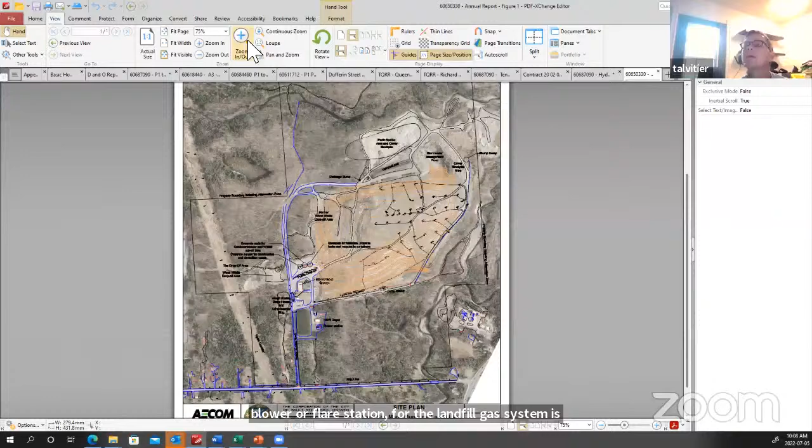I'm just going to switch over to an image of the landfill site just to get everybody acquainted with it again. So this here is what the landfill looks like from an aerial point of view. Down at the bottom end here is Fifth Line. Here's the main access road into the landfill site. We have our household hazardous waste depot. The blower or flare station for the landfill gas system is immediately south of that household hazardous waste depot. I'll just zoom in a bit here.

Just takes a minute to regenerate. We'll go in one more time here.

There we go. So we've got our household hazardous waste depot, our blower station, the two weigh scales for entering and exiting the site, and the public drop-off area. The landfill mass itself is over here where you see these orange lines, which are the final contours for the landfill site.

These lines with the little circles on them are the landfill gas collection system, a network where each dot is a vertical gas well connected by piping. That piping takes the landfill gas down to this blower flare station where it is burned. So that's a quick overview of the site.

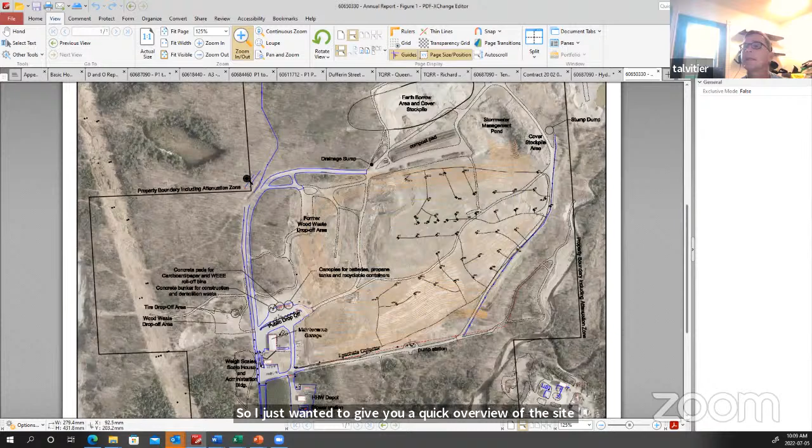A couple of things we'll talk about next: there's a stump dump where we store stumps, located in the northeast corner, where we manage them. There were some enhancements done to that area this year.

Similarly, this is our new wood waste drop-off area, immediately west of the public drop-off. Some of you may recall there was a former wood waste drop-off area in the northwest corner of the disposal footprint. Because we want to use that area for disposal of waste now, it's been moved over to the western portion, which is much easier for public access.

You now leave the public drop-off and come directly to the wood waste drop-off, where you can drop your clean wood waste off. We also have our tire drop-off area moved to this location - it was formerly on the east side of the public drop-off area, so that's also been moved.

So that's just a quick overview of the site. We may switch back to that as we go through the presentation here.

Earth borrow activities continue to be prevalent north of the disposal footprint. There's a large area where we can excavate earthen material and use that earthen material for cover, and that's been continuing.

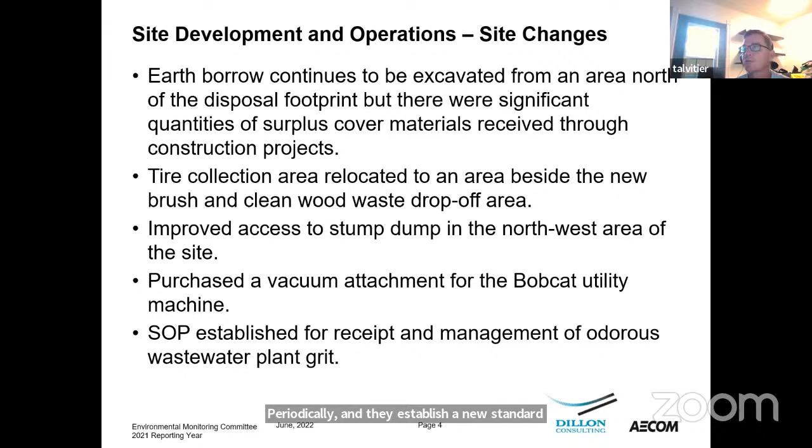The staff out at the landfill established a new standard operating procedure for the receipt and management of odorous wastewater plant grit. From the wastewater treatment plants we get the sewage sludge, but we also receive bins of grit periodically, and they established a new standard operating procedure to try and minimize odors related to the disposal of that grit material.

In terms of diversion at the site, we've got leaf and yard waste composting, which occurs north of the site. Immediately north of the footprint, where the landfill footprint ends, is the compost pad, where we have open windrows of leaf and yard waste being actively composted.

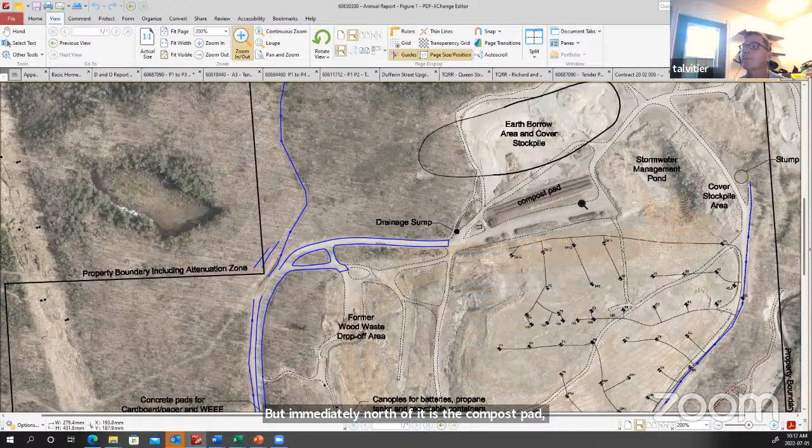I mentioned the earth borrow area, which is north of the compost area. This is where they're excavating material for cover on a regular basis.

In terms of diversion, we have leaf and yard waste composting, we collect tires, batteries, propane tanks, metals, various appliances, clean wood waste, and recyclables - our standard blue box recyclables, which include fibers and containers. You can see in the images here there's an area at the public drop-off for the blue box recyclables.

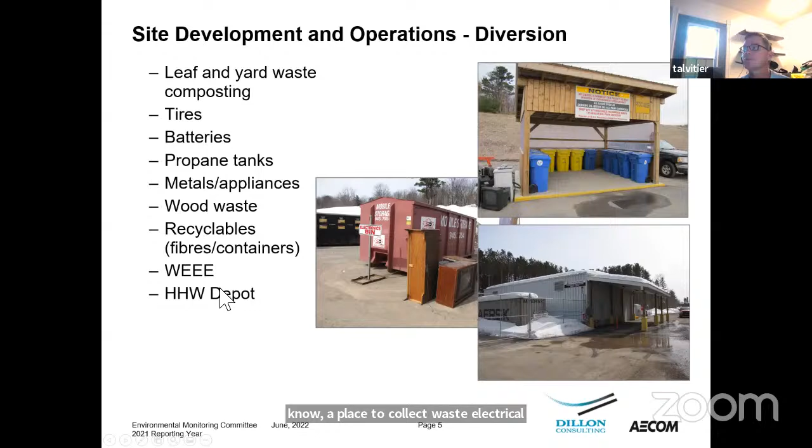In the bottom right corner, we have a picture of our household hazardous waste depot. This here is the electronics bin, a place to collect waste electrical and electronic equipment, and as I mentioned, the household hazardous waste depot.

In terms of litter control, there are a number of things done on a daily basis. The waste, as it's disposed of in the working face, is compacted daily with our waste compactor. Cover is applied daily to try and mitigate wind-blown litter. We also have portable and permanent fencing installed at the site - on the right image here you can see one of the permanent fences along one of the access roads.

This is along the eastern portion of the landfill. We have these larger portable fences installed right near the working face, and they can be moved depending on which way the prevailing winds are blowing on a given day. So they're used immediately at the working face.

And then we have litter pickup programs, both manual and industrial vacuum. This is one of the industrial vacuums, but they did purchase another industrial vacuum this year to use with the Bobcat.

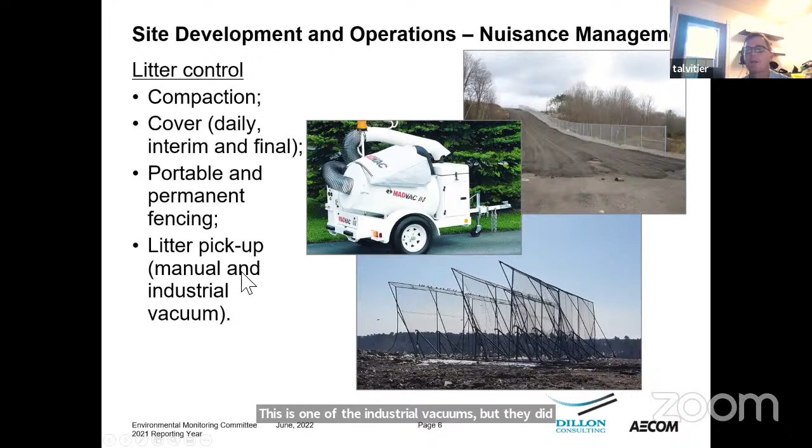In terms of nuisance management and in particular odor control, as we talked about, that active landfill gas collection system has a blower station which generates a vacuum on the landfill mass. We talked about those vertical landfill gas wells and the subsurface piping. So there's a vacuum generated within the landfill mass to draw the landfill gas down to this station. And here you see a flare, where we burn off the landfill gas. This particular system is now active across the better portion of half of the disposal footprint and has been very beneficial in reducing odor generated at the site.

One of the big challenges we've had is with respect to the biosolids, or sewage sludge. To manage the odors associated with the sewage sludge and its disposal, before the sewage sludge leaves the two treatment plants, there's an odor reducing or odor neutralizing agent applied to the biosolids in those trailers before they leave the plants and are transported to the landfill site.

Once it is disposed of in the working face, cover is applied promptly. And also when those empty trailers leave the site, there's another application of odor neutralizer applied to them. In transit to the site, we have impermeable tarps on the trailers to try and contain the odors.

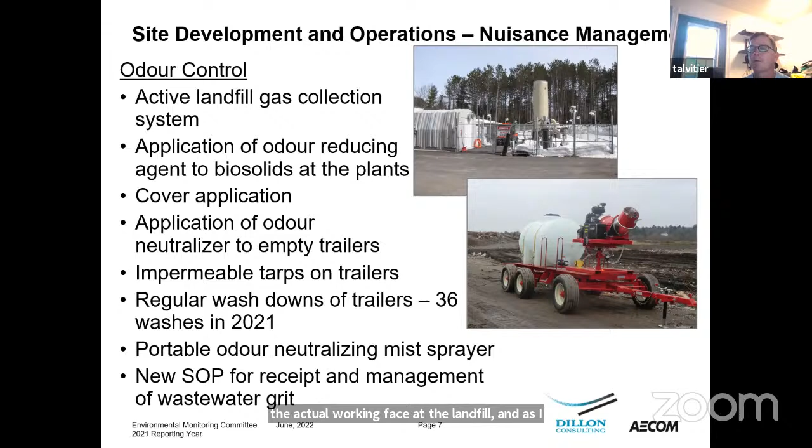At the site itself, you can see in the image here we have this portable odor neutralizing mist sprayer. Depending on the direction of the winds on a given day, this will be set up in a location during the disposal of the biosolids to try and neutralize the odors associated with the biosolids in the actual working face at the landfill. And as I mentioned earlier, there's that new standard operating procedure for the receipt and management of the wastewater grit as well.

In terms of odor complaints, we would like to jump up and down and clap our hands about the fact that we had no odor complaints in 2021. We realize, however, this is an anomalous year in the sense that we certainly don't expect that to be the norm. So the city is continuing with their rigorous activities and trying to manage odors as best as possible, and that same rigorous program will continue.

We are happy to see very little odor complaints, none in 2021. However, in general, we've been seeing roughly an average of about 10 odor complaints a year, so this was a bit of an anomalous year. Typically, based on historical odor complaints we've received, we believe they are largely related to the delivery and disposal of the biosolids.

Most on the call are aware that we are currently in the design phase of a biosolids processing facility, which will be used to receive the biosolids. It will be a building-type structure where, rather than dumping them in the working face of the landfill, the biosolids will be received, mixed with amendment, and composted in a controlled environment with odor control. Once that facility comes online, estimated to be 2025, we expect it will have a significant beneficial impact on odor as well.

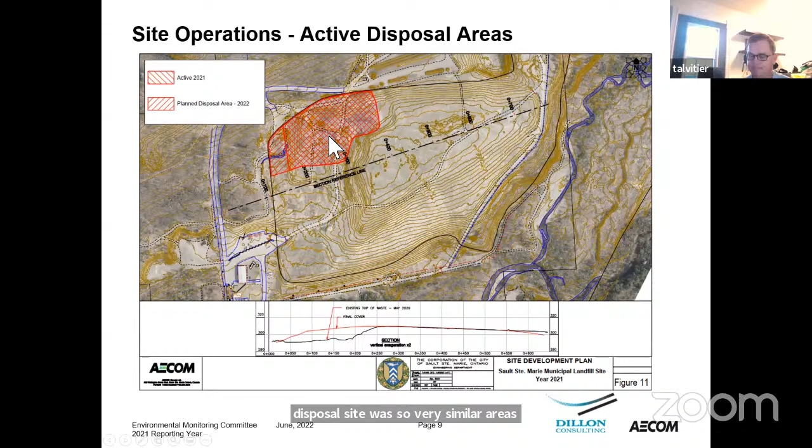If we have a look at this particular figure, what we're trying to show here is where we have capacity remaining within the disposal footprint. In the legend, as you get to a lighter color, specifically yellow, that means we've reached final contours and can't put any more waste in the site. As you get into the darker colors, the purple and dark blues, those are the areas where we have the most disposal capacity remaining.

Where it is purple, we have more than 15 meters of depth left to place waste. There's one little location here where we've got as many as 15 meters in depth of waste where we can place more. You can see where we've been active in the more recent past in this northwestern portion, where the color is becoming a little lighter as we use up disposal capacity.

I will note that this image is from April 2020, which was the last time we did a full aerial survey of the disposal footprint, so this only reflects what the capacity was at that time. We just completed another aerial survey of the site this past spring, and next year's report will show different colors, particularly in the Northwest area, where again we've used up more of the disposal capacity.

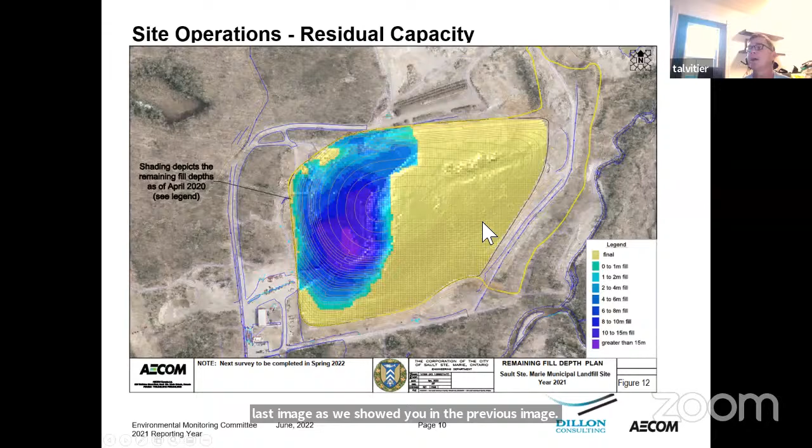Our residential diversion rate over the past 6 years or so has generally been in the range of about 30%. There have been some minor adjustments here and there, moving around from that 30%. We believe in 2020 there were likely some impacts associated with COVID that brought that diversion rate down moderately.

For those who have been on the committee a while, there are years prior to 2016 where we believe some results showed higher numbers than 30%, but there may have been some problems with that data. We think a reliable estimate of historical diversion has likely been in the range of 30%, going back all the way to about 2005. So we believe we've had about 30% residential waste diversion since about 2005, though some of this data between 2005 and 2015 may not be particularly correct.

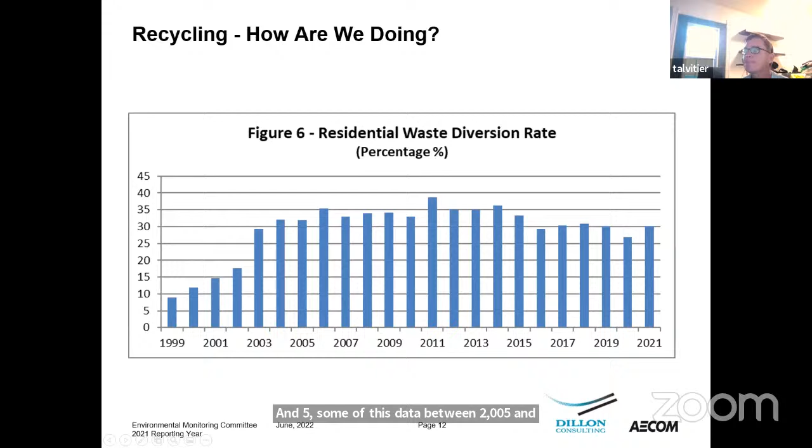In terms of waste disposal quantities, this obviously shows a telling tale. If you go back all the way to the time when the site was first purchased by the city, we were disposing of close to 100,000 tons per year. In the recent 6 years, we've generally been around that 40,000 ton per year level.

You can see that from 2005 to 2011 or 12, we were in the 60,000 ton range, then we went down dramatically to 40,000 and we've been in that range since. What I'll highlight is this reduction from around 2010 or 11 down to 2016 is largely the result of a significant proportion of the ICI, or commercial, waste being exported to a northern Michigan landfill. So it's not necessarily that we've reduced the amount of waste we're generating—a lot of it has gone to that northern Michigan landfill. We've been sitting now at this 40,000 ton threshold for about 6 years.

So if we compare and contrast waste received in 2020 versus 2021: up on the left is the 2020 waste received, down in the bottom right is the 2021 waste received. You'll see there's a huge difference in the number. In 2020, we received, this is waste received at the site, not necessarily disposed of, 62,000 tons. We received 112,000 in 2021, so a significant increase.

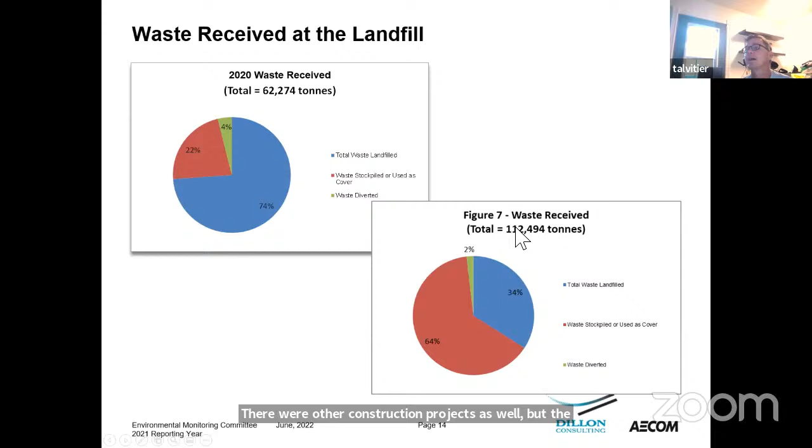There were other construction projects as well, but the lion's share of this increase is related to these materials that came to the site that are not really being landfilled. They're actually being put to use as cover material at the landfill, which means we may be able to do less of those earth borrow activities north of the site. So that's really the big difference in terms of quantities received.

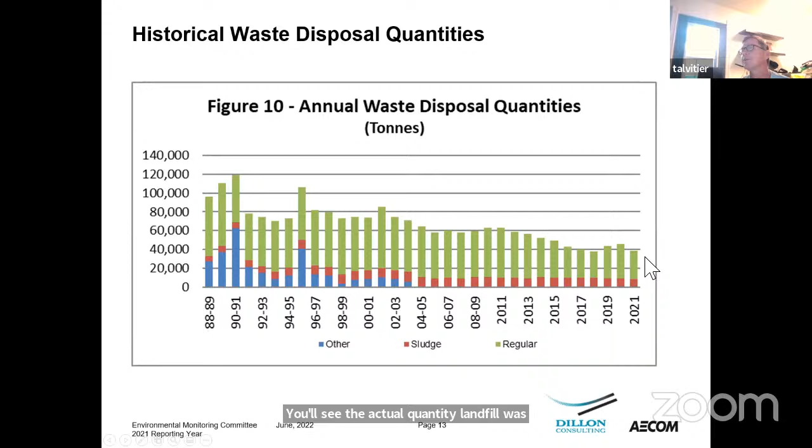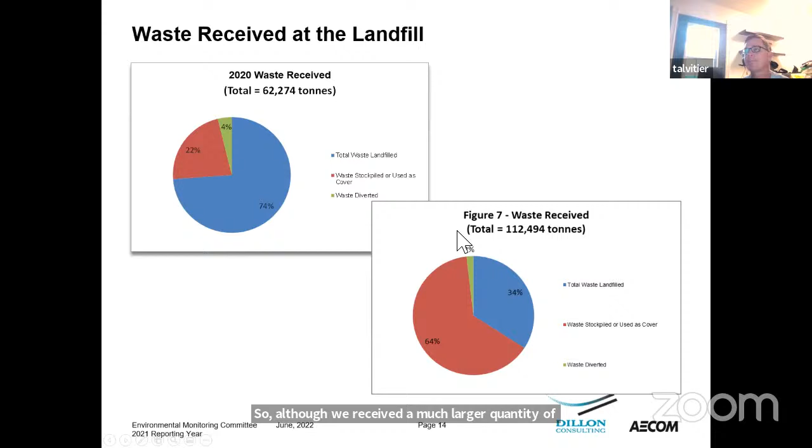Just to go back to the previous slide, you'll see the actual quantity landfilled was reduced from 2020 to 2021. So although we received a much larger quantity of material at the site, we actually landfilled less waste in 2021. We can look at the breakdown in the next slide here. This slide reflects the actual quantities that were landfilled in 2020, again in the top left, versus 2021.

So in 2020, we landfilled 46,000 tons. In 2021, we landfilled 38,000, so a reduction of about 8,000 tons. And the big reduction related to that is the public drop-off. There was a fairly significant reduction in public drop-off waste, about 2,000 tons less.

Why it's showing as a bigger piece of the pie is you'll see here, this little red area, now showing 0%, which was about 6% last year, reflects multi-residential. So in 2020, the city, as part of the city collection program, collected waste from multi-residential buildings. They discontinued that service in 2021, and it became a commercial operation. In other words, owners of multi-residential buildings had to contract with the private sector to collect and dispose of their waste.

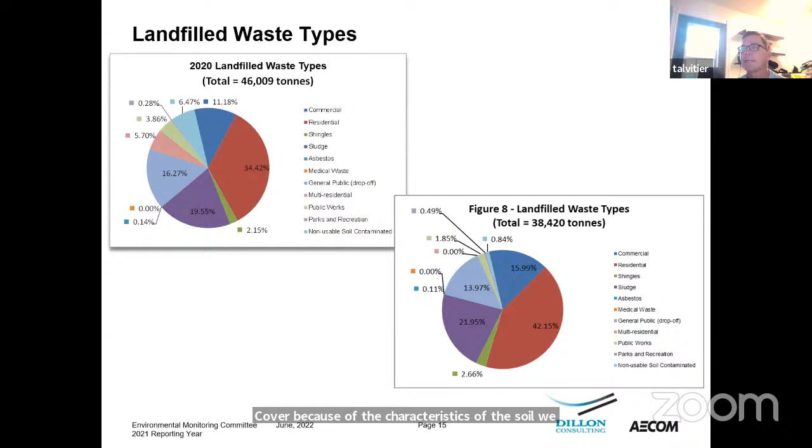The last item where we saw a big decline in 2021 is the non-usable contaminated soil, which you can see in light blue at the bottom here, which was about 6.5%, and we're down to 0.84%. So there was about 2,500 more tons of contaminated soil that we could not use as cover material. Sometimes the site will receive earthen materials that are contaminated but are not suitable for use as cover because of the characteristics of the soil. We can't use them as cover, so we actually just dispose of them in the working face.

So residual disposal capacity, we compute it and report it annually. There are fluctuations because the total height of mass within the landfill footprint reaches up to 30 meters. So over time, you will see settlement of waste. As you can imagine, you get that weight of 30 meters of waste on the bottom waste, there is some settlement that occurs. So year to year, you may actually gain some capacity in certain areas of the landfill mass due to those settlements.

Sometimes we do have interim cover, and we do have contaminated soils that are placed in the site and stockpiled, so those stockpiles may impact the calculation of residual capacity. And then waste types and disposal rates also impact the residual capacity.

As I noted, we didn't do a site survey in 2021, but it was just done in the spring of 2022. So to identify the residual capacity in 2021, we used the survey from 2020 and added to it the 38,000 tons of waste that were landfilled in 2021. We computed that we have about 5.3 years of remaining site life. The year before, at the end of 2020, we reported 6.1 years of residual capacity.

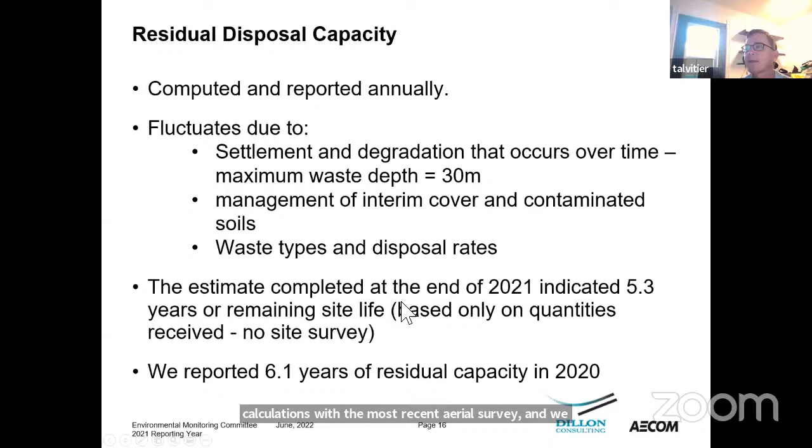And currently we're saying it's roughly at the end of December 2021, roughly 5.3 years. We are in the process of completing our quantity calculations with the most recent aerial survey, and we will be updating that number to be more accurate with those survey results.

Waste management EA, again, final submission is going to be made in 2022. We've been working with the city on resolving a couple of issues prior to making that final submission, but I think we all feel strongly that we need to make that final submission one way or the other in the current calendar year.

So we're going to do our best to resolve outstanding matters before it's submitted. If there are any outstanding matters, we certainly will be noting it in the submission that goes to the ministry. But our objective is clearly, I'm going to call it 99% final form right now, waiting for these little outstanding items to be resolved. If we're able to resolve them, we'll do that and then make the submission, or alternatively, we will make the submission as it is and make appropriate notes. So we're just sort of clearing the deck, and we'll be getting that in prior to the end of the current calendar year.

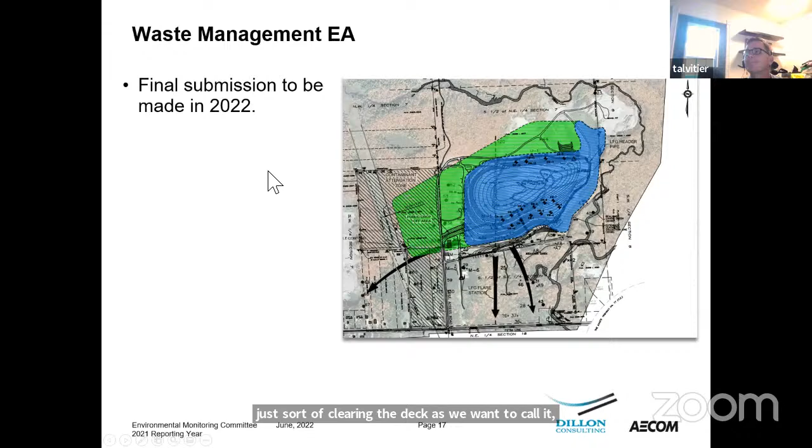Leachate collectors and purge wells. There are two methods that we collect leachate. Leachate, when precipitation, whether it's snow that melts and filters through the waste, or rainfall that falls onto the landfill mass and filters through the waste, it can pick up contaminants and become contaminated. We call that resulting water, the groundwater that now has some contaminants in it, leachate.

At our site, we have an engineered landfill where we capture the leachate by two different means. We either capture it by a horizontal collector, present along the south side and southeastern side of the landfill footprint. Bear in mind that the groundwater flows primarily in two directions: to the south and southeast, and to the south and southwest. So the groundwater at this site flows in a southerly and a westerly direction.

So that's where we have our leachate controls. One is the collector on the south and southeast. And then along the western side of the disposal footprint, we have a series of purge wells. There are 9 purge wells, duty wells labeled purge well 2 to 10, which operate 24/7, 24 hours a day, 7 days a week, continually throughout the year.

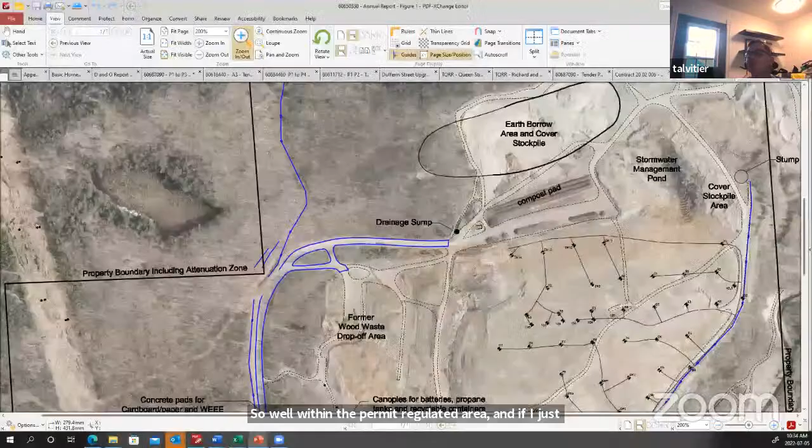And if I just quickly go back, before I turn it over to Rob, I'll zoom out here. So in terms of the leachate collector, it's hard to see, but it's this red dashed line. The horizontal collector stretches along the south limit of the disposal footprint and then continues up the southeastern portion of the site.

And this is basically a rock-filled trench with a pipe in it, much like a French drain. So as the groundwater flows into this subsurface rock-filled trench, it's collected in the pipe and is delivered to this pump station here. And similarly, on the western side of the site, we have those purge wells that stretch along the western side of the site here.

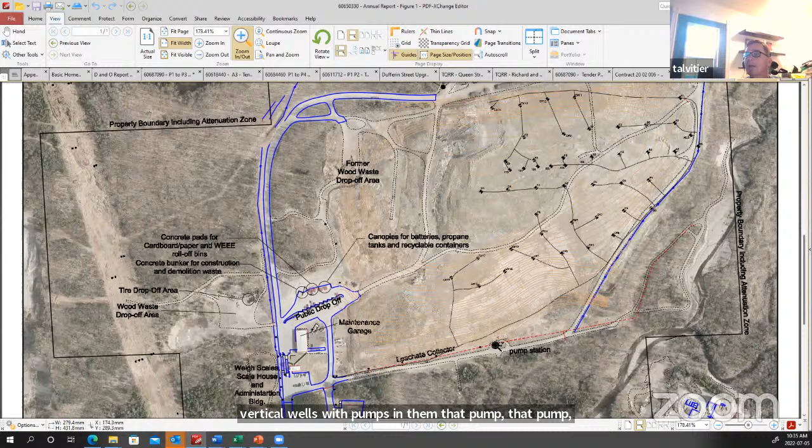They are operating 24/7 vertical wells with pumps in them that pump that leachate over to the pump station as well. And then from here, that pump station delivers that leachate through a force main all the way over to Fifth Line and Old Goulais Bay Road. And then it flows by gravity to the sewage treatment plant.

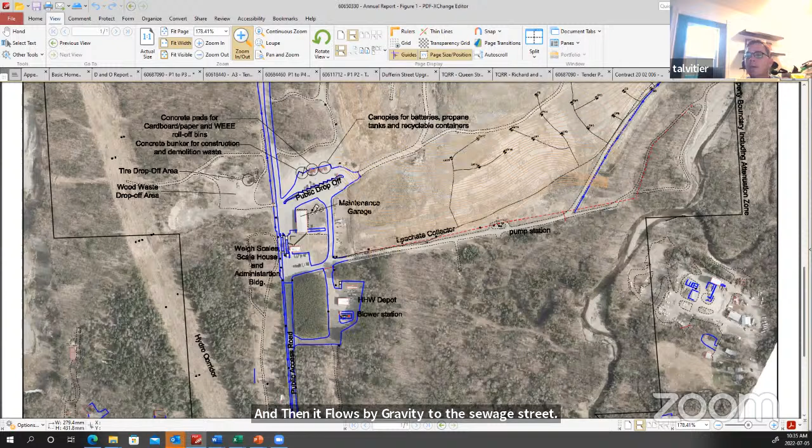So with that, I'll take a breather here and just ask if there's any questions regarding what I presented, and then we will turn it over to Rob and Monazer to talk about the annual monitoring report.

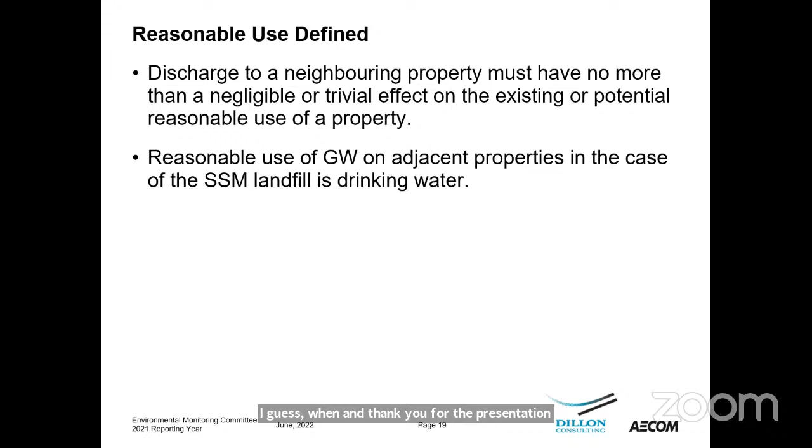I have a couple, but I'll save them for a minute. Yeah, I actually have just a couple of lay questions, I guess. And thank you for the presentation. Paul Christian here. When you were talking about the complaints, are those complaints regarding odor? Are those complaints, do we track where the actual complaints are coming from? In other words, are these all site-specific complaints?

Yeah, in general, so there is a protocol that is used by the operations staff at the site where there's a detailed record generated of the specific odor complaint. So for every odor complaint that comes in, there is a detailed record that is developed that identifies prevailing climatic conditions at the time, where the winds are blowing, what the climatic conditions are, where the odor complaint is generated from, what activities were ongoing at the site at the time, and what actions were taken by the site staff to try and alleviate the complaint. So it is a fairly detailed procedure. And Mike, I don't know if you want to add to that at all, but it is a fairly detailed procedure, Paul, that is used to certainly track the complaints and make sure every effort is made to address the complaint that is received.

Okay, thank you. Sorry, go ahead. So I think that covers that, Rick. We follow a procedure if we receive an odor complaint here at the landfill, and it's just like Rick said.

So I would assume then that for the most part, the complaints are coming from an area within hundreds of meters of the site itself, and not necessarily from any other location in the city in terms of the sewage plants, et cetera. This is all related to the site itself. Yeah, they are typically originating, Paul, within fairly close proximity to the site. Is generally the case. Yes.

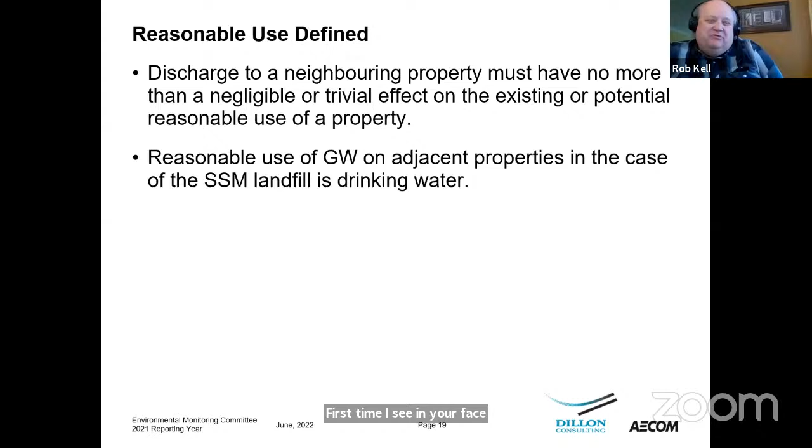So Monazer and I are both going to tag team this presentation, the remainder of it. Monazer and I have been working on the groundwater and surface water monitoring for almost 20 years together, so we're going to share the presentation. I'm going to present some of the compliance aspects, how we determine what impacts are occurring, and the groundwater portion. Monazer is going to present the surface water and the landfill gas portions.

So my first slide, and this slide I present every year, talks about how impacts are determined for a landfill site. Monazer talked about standards related to sewer use bylaws. There's also standards related to groundwater. The provincial water quality objectives that he mentioned are related to surface water.

But in particular for landfills, there's a concept called reasonable use, and that more or less says a landfill can't have more than a negligible or trivial effect on the reasonable use of a property in relation to water quality. For the reasonable use of groundwater, I do know there's a lot of municipal water available now on the fifth line, and the number of well users is reduced, but there are wells being used on the fifth line, and therefore drinking water is the reasonable use.

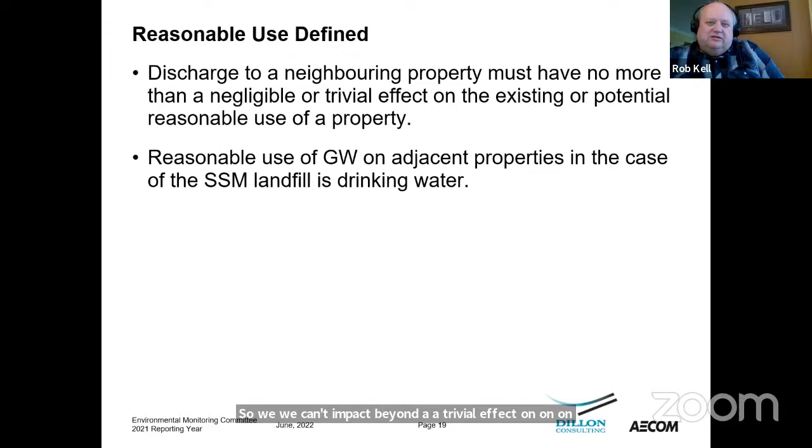So we can't impact beyond a trivial effect on groundwater. If I could have the next slide, I want to illustrate what reasonable use is graphically. More or less, the upper limit is our drinking water standard, and we're allowed, for health-related parameters, to only increase those by about 25% of the relationship between background and the drinking water standard. So the emphasis is that we're not going up to the limit in terms of the standard; we're only allowed a portion of that limit in terms of impact.

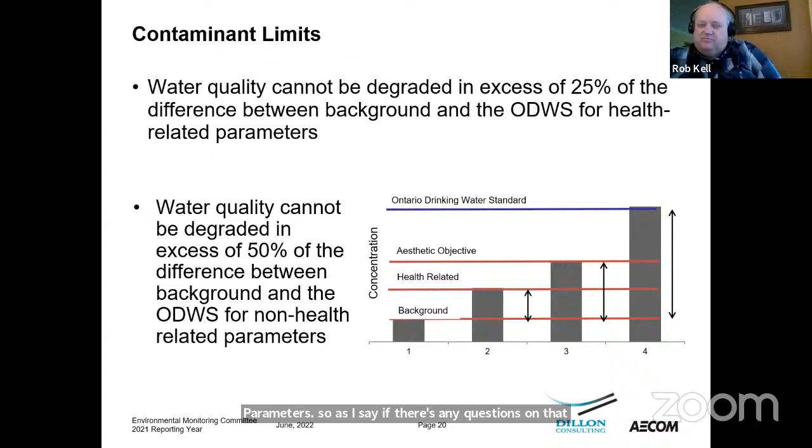For aesthetic parameters, and there are a number of those, the one we key on in the monitoring report is chloride, because of its high concentrations in leachate. We're allowed to go up to 50% of the difference between the background and the drinking water standard for non-health related parameters. If there's any questions on that I can answer them, but let's get going to the next slide, Rick, please.

So we have a number of what we call monitors, or monitoring wells—I use the terms interchangeably, so I apologize for that ahead of time. We have a bunch of monitoring wells on the site. The first monitoring well was installed on this site, I believe, in 1979. So there's a large number of monitoring wells that are either current or have been decommissioned. Right now, about half of them are in good condition to actually monitor, about 97.

But in terms of what's in our program, we have 40 monitoring wells that we key on and that we sample. It varies by location, but in areas where we have groundwater issues and so on, we sample 3 times a year. There are a couple of locations where we monitor less in terms of background, and other locations where the groundwater quality is more stable.

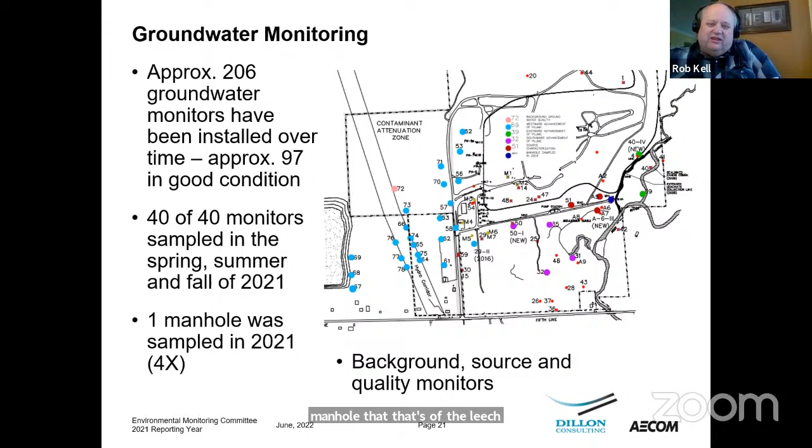And we've already mentioned, but we sample the manhole with the leachate that goes off site. It's not really groundwater related, but it's part of the program. So we sample leachate 4 times a year.

So what is groundwater monitoring? One aspect is not just water quality, but we use the groundwater levels in our wells to determine the direction of groundwater flow. The direction of groundwater flow helps us track where the groundwater is flowing to, and therefore helps us interpret where impacts are migrating.

As I mentioned before, the groundwater quality is assessed for compliance with reasonable use, which is applied at the compliance boundary, more or less the property boundary. In terms of the groundwater chemistry, we look at a number of things: major and minor ions, trace metals, and volatile organics.

Right now, our volatile organics are very low level. In terms of going for long-term trends, we really key on the major ions, and as I said before, in particular chloride, because of its high concentration in leachate. Metals themselves and how they move in groundwater...

What would non-scientifically be called heavy metals, or metals with higher atomic weight, tend not to move in groundwater. They have low solubility and tend to adsorb, or stick, to soil particles. So you'll see in our discussion some focus on things like iron, but things like lead and others are very, very low level, well below standards.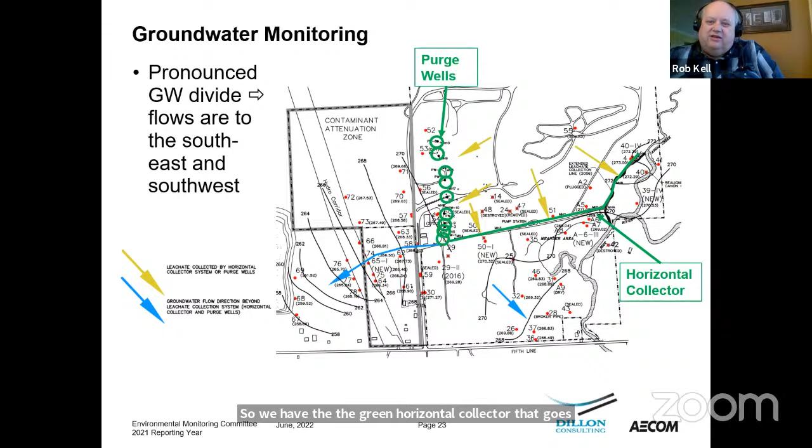And so that led to this dual collection method that we have for this site. We have the green horizontal collector that goes on the south side, and it was extended up along the former alignment of Cannon Creek to the northeast there.

And then we have these series of purge wells. One of the reasons we use a purge well system instead of a horizontal collector is that the water table is quite deep in that area, on the order of 60 feet or so, so we couldn't dig a trench that deep and put a collector system in.

So we have these series of purge wells that, through a combination of what we call well interference—when wells are installed close together, their zones of influence overlap—you get fairly complete collection, so water tends not to flow between them. The cones of depression actually add onto each other, and we get a good collection system. So those are the two methods at work there.

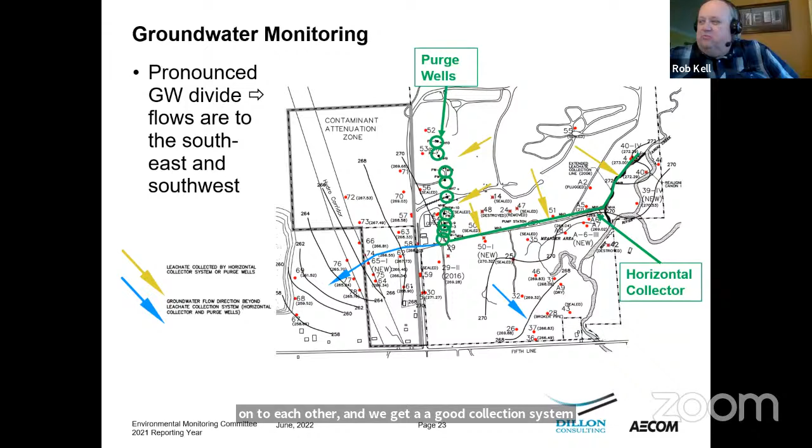In our discussion, we talk about how we assess groundwater, looking at the different areas of the site. The east and south boundary is in the former meander area, south of that horizontal collector, as well as potential impacts that could go towards Cannon Creek and potentially beyond.

This is an area that, when I first got involved with the landfill back in the early 90s, as the horizontal collector went in, all of the concern was placed solely in the meander area to the south, because of the impacts there. Since we've been pumping there for 30 years now, the impacts in the meander area are basically non-existent when you compare today's data with that of 30 years ago.

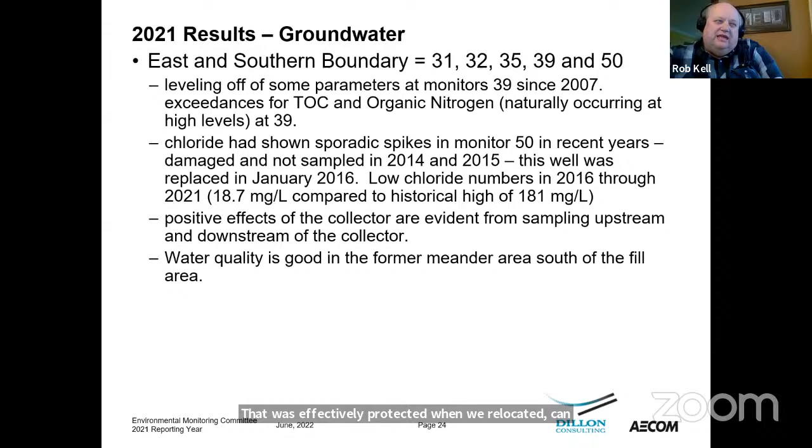And so this is a good news story. This has been very consistent since we've put in the collector system—we have good control of groundwater impacts to the south. Cannon Creek to the east was effectively protected when we relocated Cannon Creek a little bit to the east, allowing us to extend the horizontal collector system in that direction.

So we have that same type of protection. For the next slide, Rick, we'll talk about the west boundary. The west boundary, again, has very deep groundwater, so our monitoring wells are much deeper than in the meander area, where they're quite shallow, as you can imagine.

We've had impacts in that area, which caused us to install progressively more purge wells. I would say for at least 10 years, if not about 15 years, the purge well system has been very effective at limiting impacts. But we have identified a very small—well, not so much small, a very narrow—plume. So there's an area where we have impacts going to the south and west.

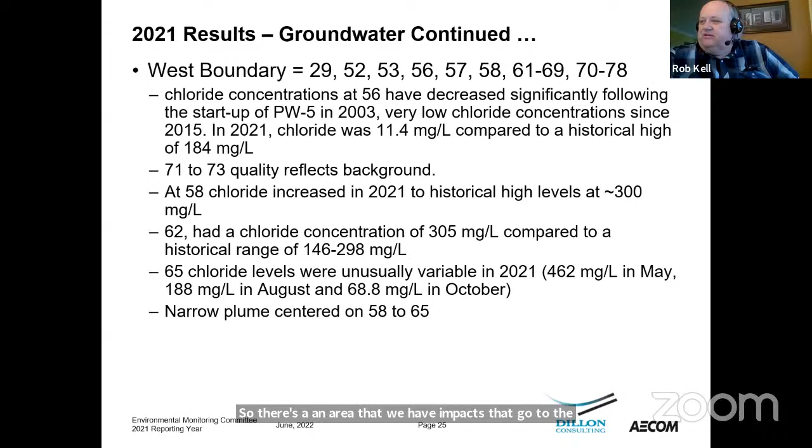Maybe the next slide, I think there's a graphic coming. Yeah, so...

This is an illustration from last year in May of 2021. You can see at 65, we have a pretty high value in terms of historical data of over 400 at that monitoring well. We do concentrate on this because it is an identifiable impact, but all those purge wells to the north are doing their job.

As one of the ways to mitigate this, one of the issues we've had is that our impacts seem to go - there's certainly no steady trend up, but we do have a few years of higher results followed by a leveling off and a decrease, and then we've had higher impacts here now for the last 3 monitoring years in a row.

So we've installed a new purge well, which is in between purge well 1 and purge well 3. And you can kind of see that it's in the heart of that - if you draw a straight line from 65 and follow those contoured plumes back, it goes right to that new well.

It was installed in late May and has been operational since. If you can recall, a couple of years ago we talked about perhaps putting this purge well in but having it as a standby well, a duty-standby situation. But for a couple of reasons, we're going to be operating it full time.

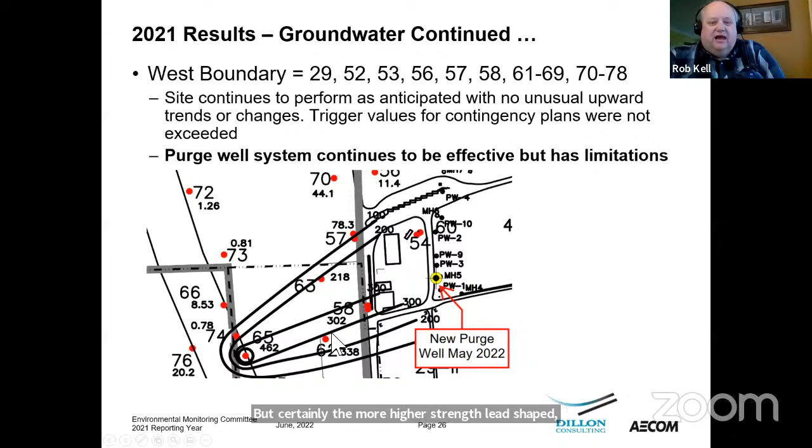In terms of the natural groundwater travel time, it takes more than a year to go from that purge well system down to 65. So I don't want to leave the impression that this is going to be an immediate fix, but certainly the more higher strength leachate we remove near the landfill, the better impacts we'll have in that narrow plume that I talked about.

So that's the end of the groundwater discussion. Muntazir has a few slides on surface water and landfill gas, and I'm happy to answer questions now about groundwater, or we could just wait for Muntazir. Why don't we do that, because at the end I'm going to come back with some conclusions that are also groundwater based. So I'm going to pass it on to Muntazir.

Hey, thanks, Rob, and nice to meet some of you and see some of your faces for the first time. Usually I just hear your voices. So nice to meet everyone.

And then S3 is located closest to the landfill, so that's where we would expect some issues to occur before any others. S4 is located a little bit south of that.

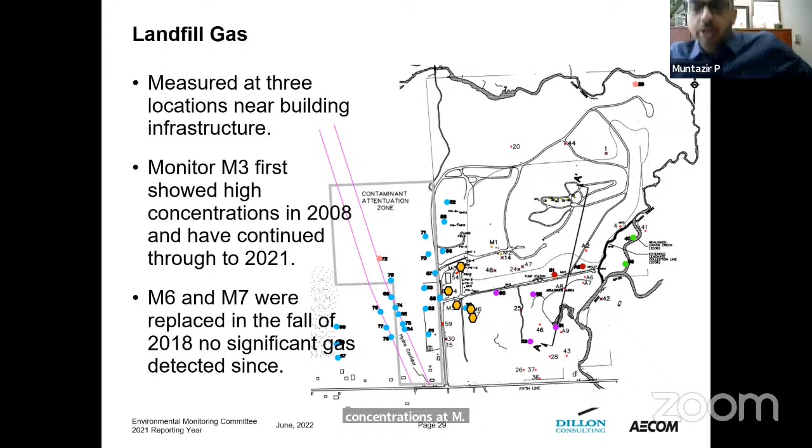So it's critically important to continue maintaining M3. Now, the other methane monitors as a comparison: if we're getting concentrations at M3 of greater than 450,000 parts per million, we're getting values in the range of 170 parts per million to as low as 95 or 70, up to 220 parts per million in 2021 for all those other wells. So very, very low, not even close to the lower explosive limit. No real issues there at the methane monitors to the south, but M3 has significant concentrations. That's expected because it's closer to the fill area, so it's not unexpected to have high concentrations at M3.

So again, low readings at M4, M5, even 6 and 7, high concentrations at M3, and detection and mitigation was added to buildings back in 2009. The big takeaway from this is to continue making sure those alarms and systems are maintained, so that in the case of any methane leaks inside the building, staff are safely evacuated and there's no concern there.

Every so often, the Ministry of Environment, Conservation and Parks issues a review of the annual monitoring report. But we haven't seen one since 2016, which was a review of the 2014 monitoring report. Prior to that, we would see a review every 2 to 3 years. It's been quite a while since we've seen one, so it wouldn't be surprising if another review is coming up soon.

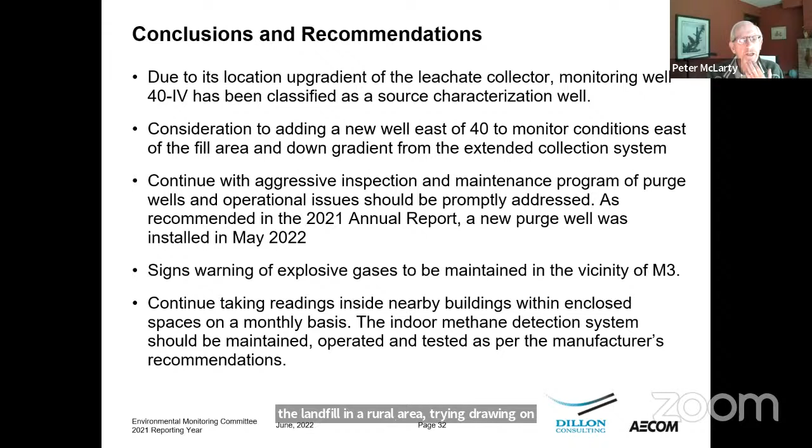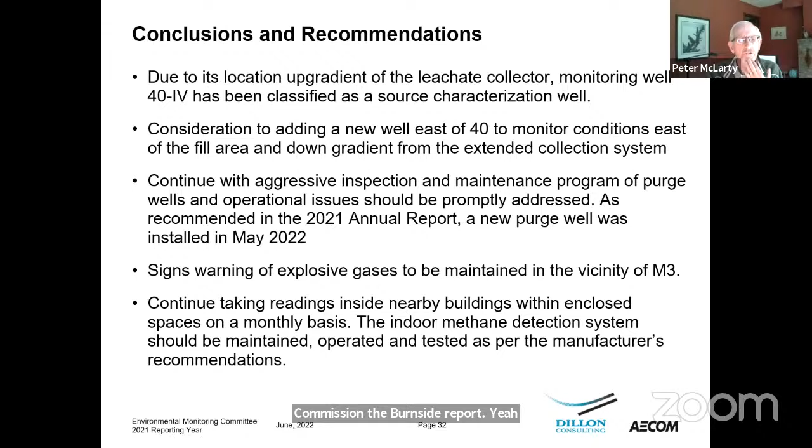Also, I'm living directly southeast of the landfill in a rural area, so I'm drawing on groundwater. In the 80s, the PUC commissioned the Burnside report, which demonstrated that the landfill is sitting on the aquifer recharge area, within the 25-year time of travel to our east end wells, and they were showing a plume of contaminants leading from the landfill area in the direction of the wells.

Then the city became involved and bought out Cherokee Construction and put in the purge well. So there's a long history to this. My concern is to the southeast, so I keep bringing up well number 40 and its replacement, because there's only one real monitor testing the southeasterly flow.

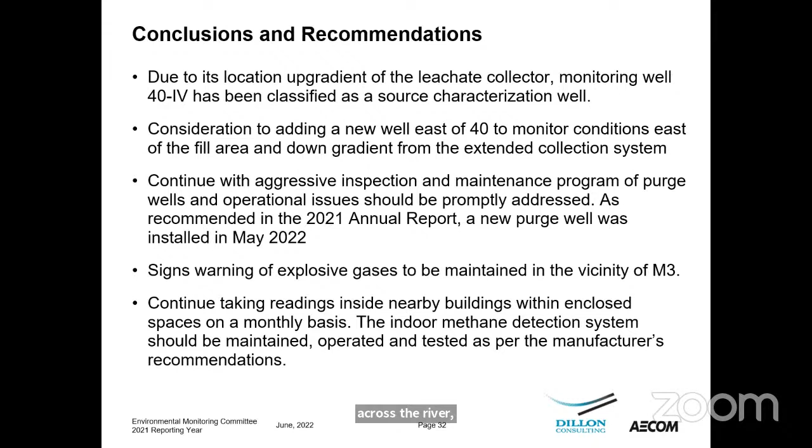As you mentioned, that's private information, so we don't have care and control over that. I don't have any knowledge of those volumes other than what Rick's presented in terms of what we used to get at the landfill as opposed to what we have now. So there may be some general assumptions we can make there. Rick, do you have any further comments on that?

I guess what we can share, Peter, is that back around 2012 or thereabouts, when we believed we were getting the lion's share or all of the ICI waste at our site, it was more in the range of about 25,000 tons compared to say 5,000 or 6,000 now. We don't know the trends in how the generation of ICI waste has changed, whether there's more or less being generated between that earlier time frame and now, but we do know back in those earlier years it was more in the range of 25,000 tons compared to what we're seeing now.

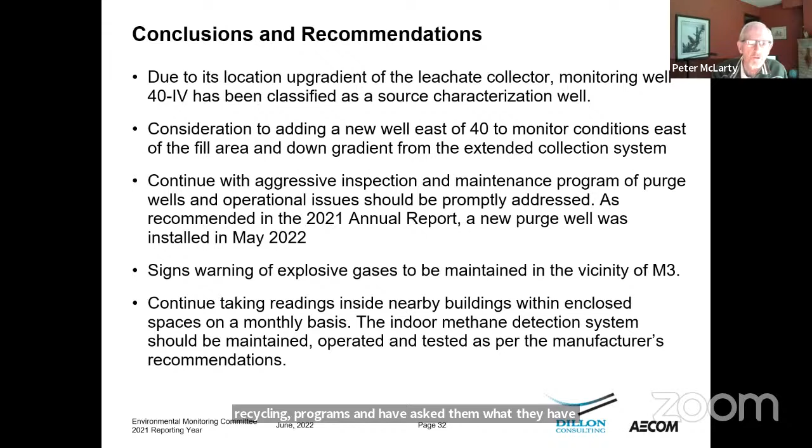Putting on my Clean North education hat, when I talk informally with teachers in the schools, I ask them what they have for recycling programs and waste reduction programs, and most seem to say they don't have one. That bothers me. I'm not quite sure how to deal with that, maybe go to the school board itself. Then you look at the hospital and see the amount of disposables, especially during the pandemic, gowns, masks, gloves. The volume has been huge.

So I'm guessing those numbers may be trending up. At some point either the Michigan government or the Ontario government are going to say we don't do this anymore, and then we'll have to deal with their waste again. Anyhow, it's an ongoing issue.

For the benefit of the committee, Peter, within the environmental assessment for the expansion of the existing site, that is the argument we've made in terms of future waste disposal quantities. We've made it very clear that we've incorporated the historical quantities back to the 2012 and earlier era, where we believe the lion's share was coming to our landfill. We've used those quantities in projecting future quantities that may be received at our site, because we don't know how the regulatory environment may change, in the sense that the crossing of the border with waste may disappear in the future.

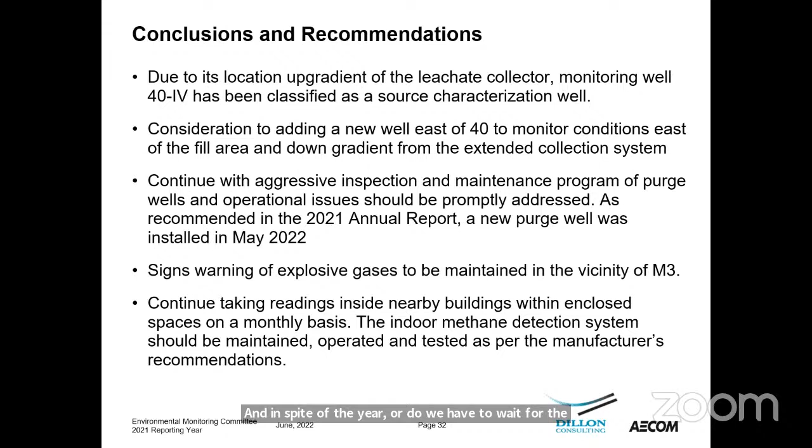The organic composting facility, is that going ahead in spite of the EA, or do we have to wait for the EA for that? No, that had its own separate Class EA that was completed separately, so it's moving forward, not contingent on the current EA for the landfill expansion. Timelines on this facility? Again, it's intended to be operational sometime late 2025.

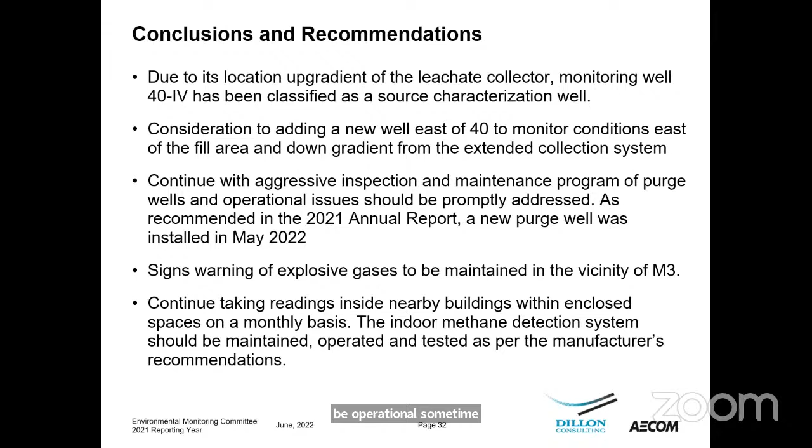Thank you. Are there any other questions, comments, or concerns?